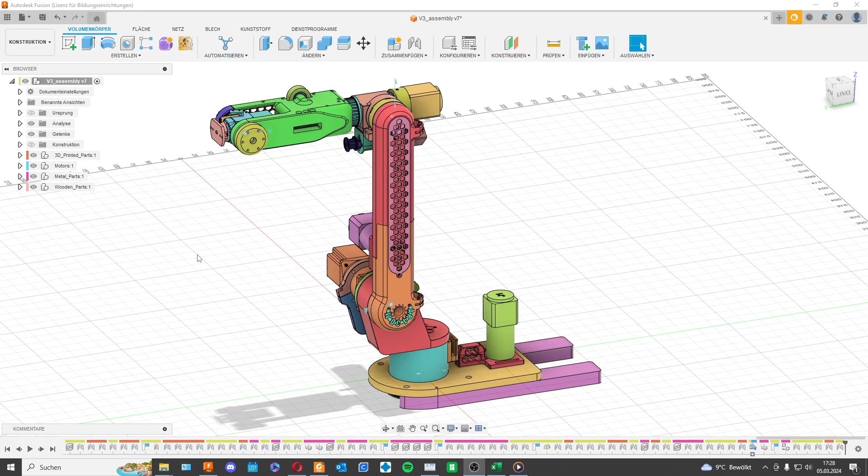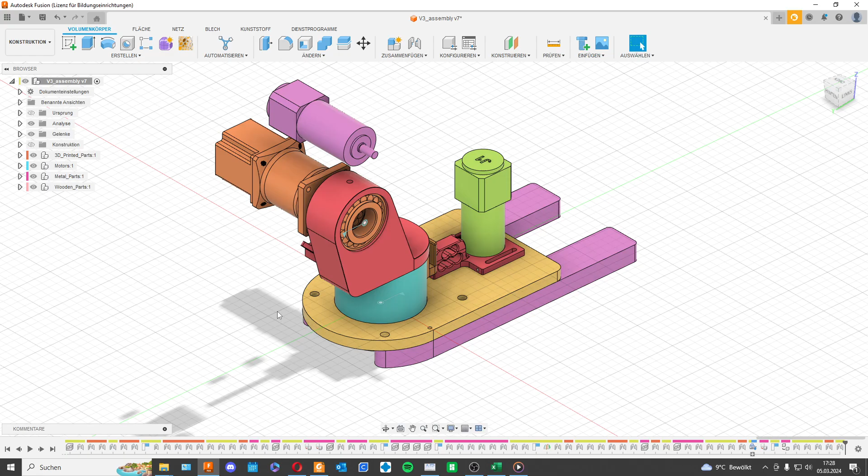So let's start with joint 1 and just isolate those parts and the base plate, of course. So the base plate is made out of wood, as I mentioned maybe before. I've made some different videos, so I don't know what I've described yet or not.

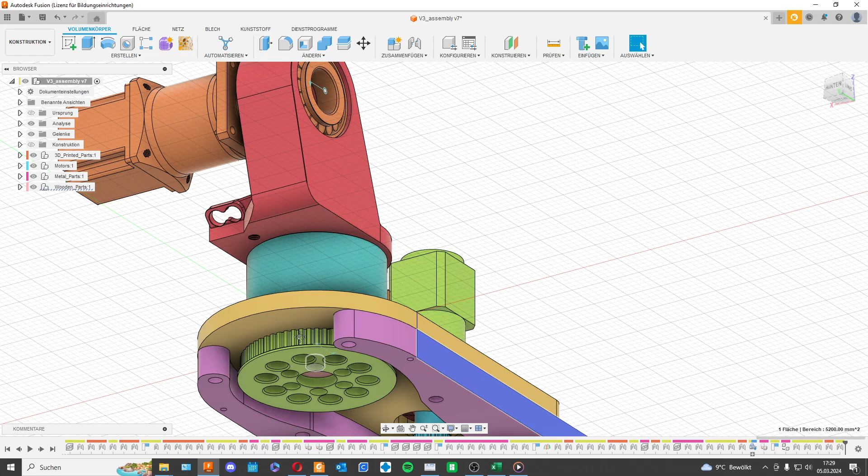But the base plate here in yellow and in pink are made out of wood, and they provide support for the J1 turret housing and the space for the pulley system underneath the robot that goes to the J1 motor. The J1 motor is held in place via a 3D printed part.

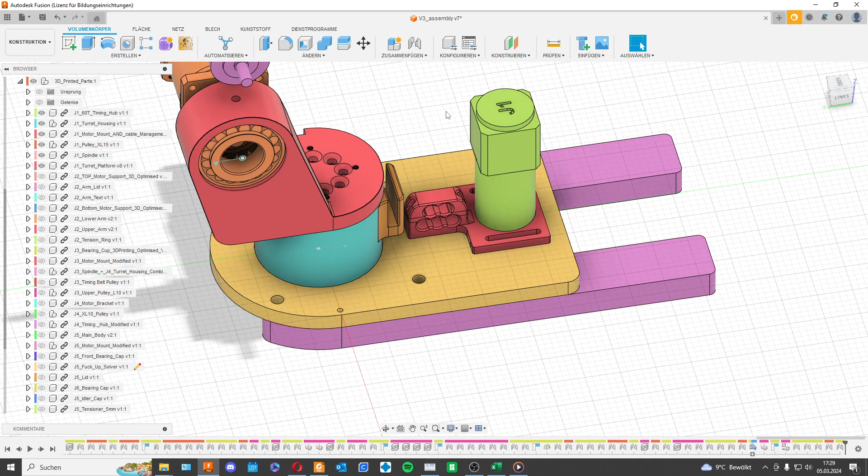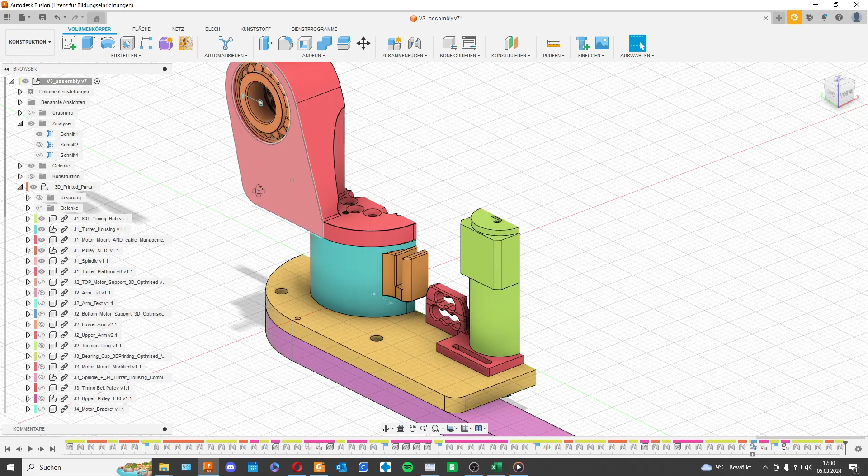This J1 motor mount also has the cable management for the rest, for the 5 motors that come after J1, of course, so that the electrical management is neatly around the J1 turret housing. In the turret housing we have the tapered roller bearings. There are in total 2, and the tapered roller bearings sit on this little ledge in the J1 turret housing.

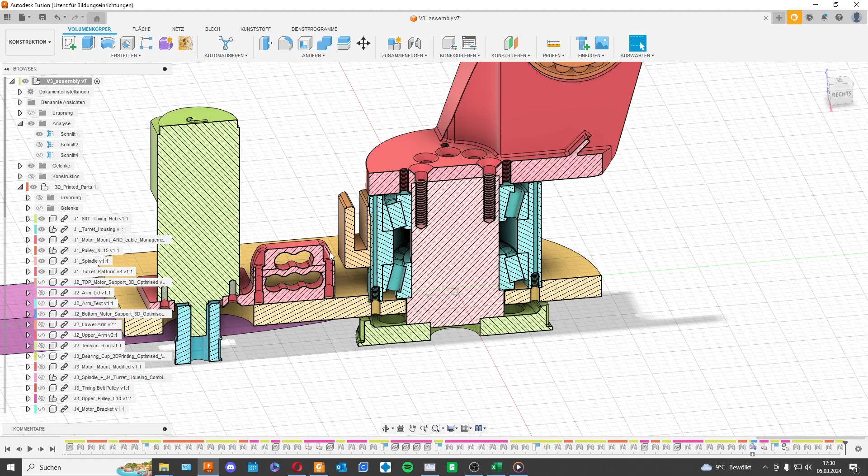The J1 turret housing is basically a replica of the base design from Chris Annin, but I reinforced it with some steel reinforcements so that it could better hold the strain and the forces that it is under, because of course all the strain from the rest of the robot gets transferred via the tapered roller bearings onto the J1 turret housing and into the base plate.

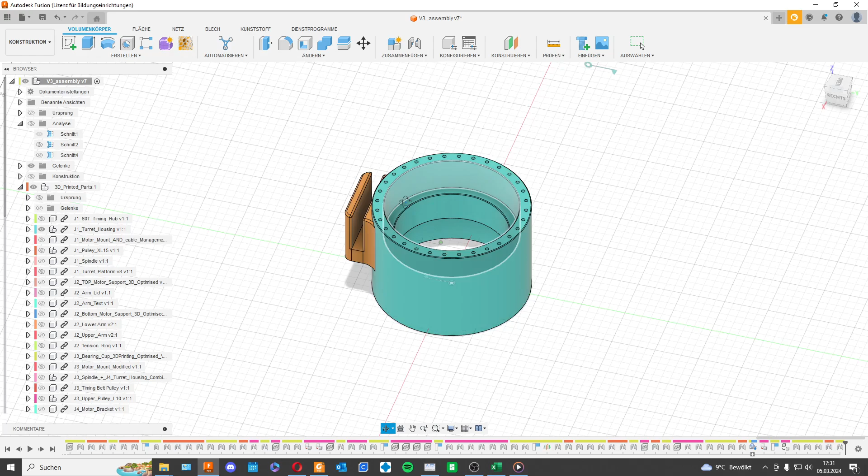So around the perimeter I have some through holes, and you can put steel reinforcement in there and glue it in place. I also made an adapter for the turret housing so I could use different limit switches. The limit switch is just placed in here and glued in.

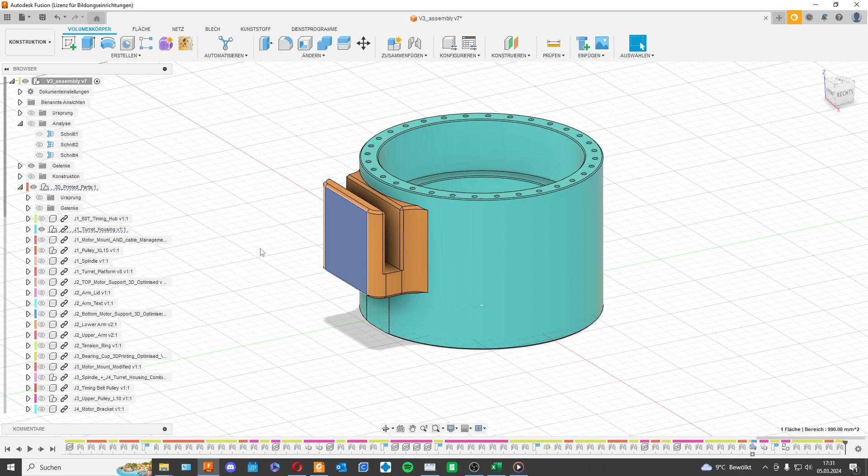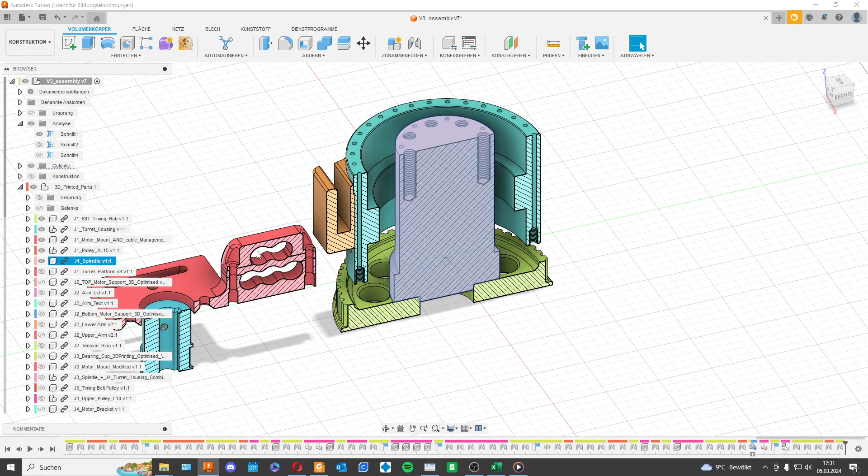Also reinforced is the J1 spindle, which you can see here. And the pulley gets screwed into the spindle, and the spindle gets screwed on top of the J1 turret platform.

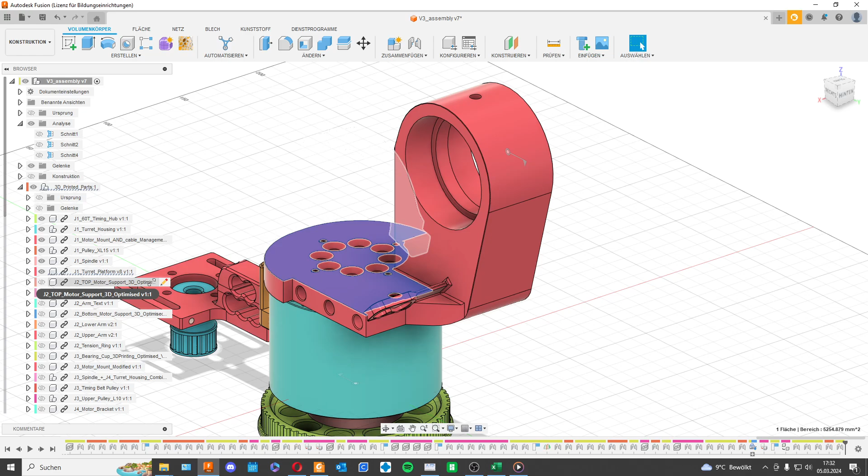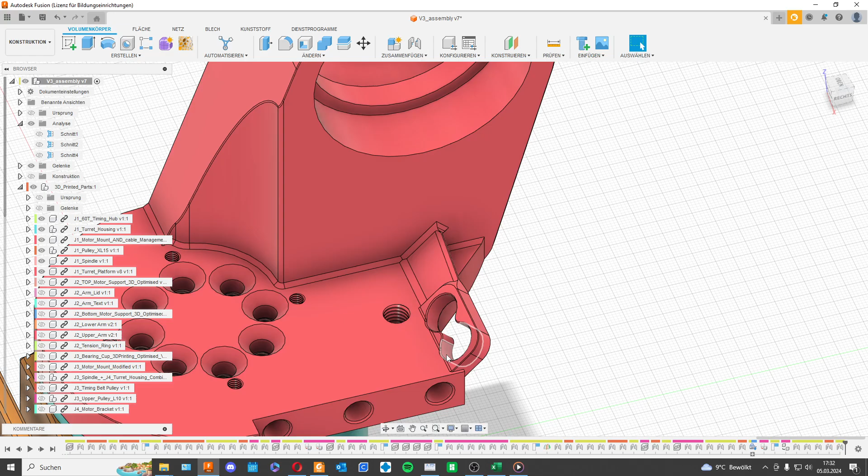The J1 turret platform in the base design is actually 2 parts, because the turret platform and the J2 motor mount, well, this part at least, is separate and screwed in from the bottom, but I combined them and also designed a little space so that the electrical wiring could be routed through.

That's the video and the description of the J1, and then in the next video I will describe the J2, which is a little more different as it describes the arm assembly.